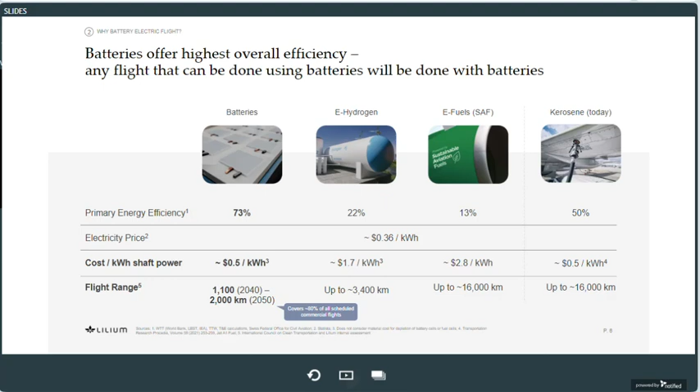Over the next 1 or 2 decades, we expect 75% of electric aircraft performance improvements to come from the battery. So the battery is the performance driver in an electric aircraft. The two key aspects here are power for takeoff and landing, and energy for the range. Beyond that, every cell design is a compromise across many competing aspects such as safety, cost, cycle life, recyclability, and many other factors.

As a short recap, the key differentiators of our Lilium jet are the largest cabin in the sector with clear premium positioning and aesthetics. With $2 per passenger kilometer, we have low operating cost that even includes margin for an operator, and we focus on regional missions.

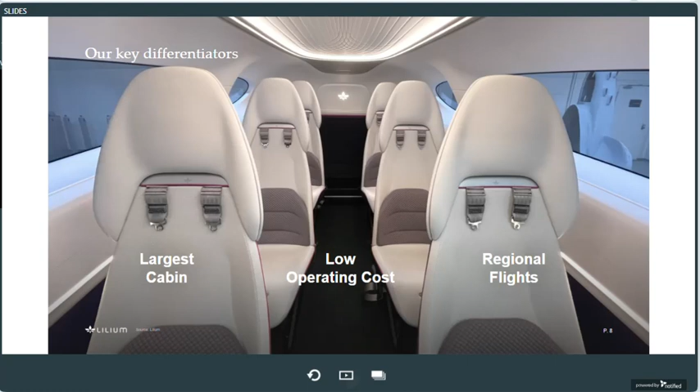And beyond that, on the technical side, of course, we are highly differentiated, developing the first eVTOL aircraft using electric jet engines. 95% of all aircraft on the globe use jet engines. And I'm quite sure if you have flown turboprops, you know from your own experience why passengers prefer jet aircraft. They fly faster, they have lower noise emissions and vibrations in the cabin, they are and feel safer, they clearly have better aesthetics, and on top they are simpler as they don't require variable pitch on the blades.

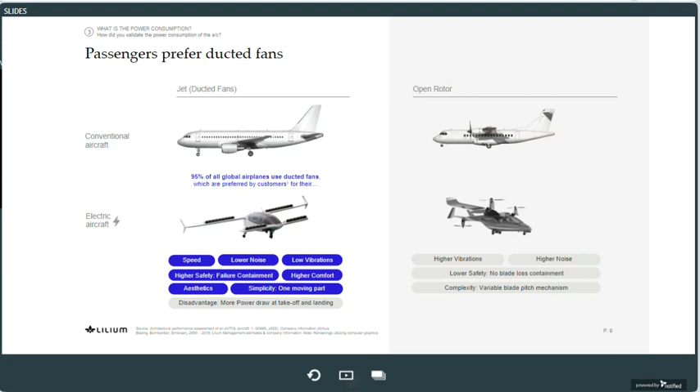However, jet engines are also well known to require more power at takeoff and landing. So let's look into quantifying this disadvantage and evaluate whether the benefits still outweigh the disadvantage.

To get going, we need to understand the concept of disk loading. Disk loading is the weight of the aircraft divided by the total cross-section of all propellers or engines. And what you see on the left is a graph drawn up by NASA around 20 years ago, showing the hover efficiency of various aircraft types depending on their disk loading.

This is applied physics, so this graph does not change, just like gravity, the Earth's surface, or pi does not change. In general, the rule applies that the lower the disk loading, the lower the aircraft power consumption in hoverflight. But also, the higher the disk loading, the faster the aircraft flies.

You can see that a helicopter has the lowest disk loading among traditional aircraft, with around 25 kilograms per square meter. On the other side, on the right, a direct lift aircraft such as the F-35 is operating at roughly

1,000 times higher disk loading since it is a high-speed aircraft. Now we will use this chart to get an idea of the power consumption in hoverflight in a very simple way. Our aircraft is using jet engines and it has a disk loading of around 1,150 kg per square meter. We go into the chart and obtain a lift efficiency of around 1.7 kilograms per kilowatt of shaft power.

Now we invert this value to obtain shaft-specific power. We divide by the electric powertrain efficiency to obtain specific electric power, and we multiply with our aircraft weight to finally obtain the total electric power draw of 2,147 kilowatts.

Now let's do that very same exercise for a propeller-based eVTOL, which typically has around 60 kg per square meter disk loading, and we get 1,014 kilowatts.

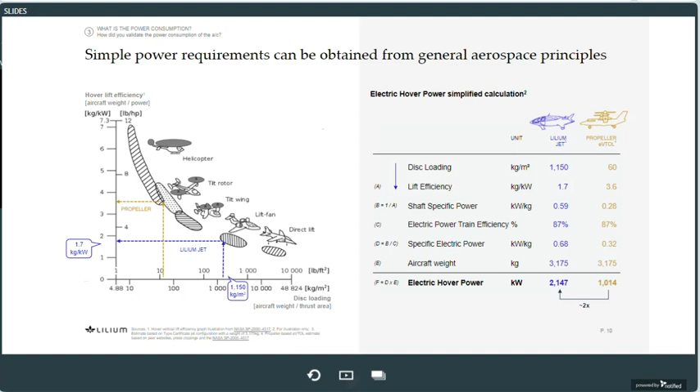But before just accepting those values, let's check how they compare to power measurements from our real-life flight testing with our demonstrator aircraft. On the left chart, you see the measured specific electric power of our demonstrator aircraft in a pure hoverflight mission. This is the first time we are publishing this data.

Now we can take the specific electric power consumption measured in hoverflight, 0.62 kilowatts per kilogram. We multiply on the right side again with the weight of our aircraft, and we are getting the power consumption based on real flight measurements.

What you can conclude from this slide is that our flight test results show slightly lower power consumption than what we got from the NASA paper. But overall, the simple approach of the NASA paper predicts power very well.

I will use the high power consumption value from the NASA paper throughout the rest of this presentation to be conservative and also account, for example, for flight at higher altitudes. Also, it is important to note that all our mission profiles and range estimates are based on the fully loaded aircraft. So with the full weight, we are flying those missions.

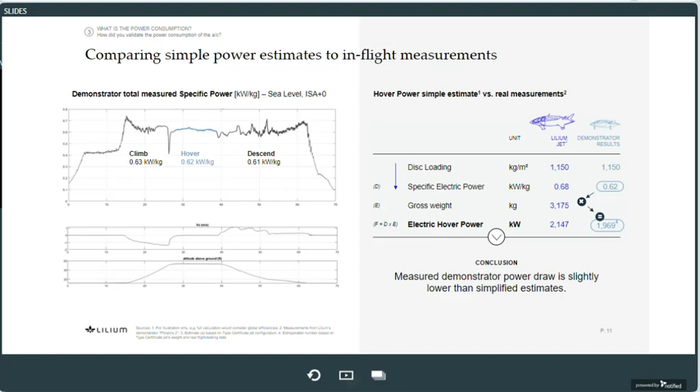What I have just done is an ultra simple approach to demonstrate power consumption, which you can easily follow in a presentation. Of course, our engineers are using far more sophisticated tools to calculate the power consumption of our aircraft. We are following the principle of evidence-based engineering at Lilium.

This is the same approach which allows the major aircraft OEMs to predict fuel consumption of their aircraft with an error of less than 1% before they actually fly.

What we need for certification of the aircraft is a validated aircraft performance model which accurately predicts flight physics of our aircraft in all flight conditions. This includes, for example, failure cases, the full speed envelope, altitudes, temperatures, and maneuvers.

To get it, it all starts with simulations. Based on those simulations, we design a first loop of our aircraft and systems. Then we did 4 years of flight testing and a total of more than 5 months of wind tunnel testing

to obtain real-life data with which we can calibrate and validate our simulation tools. Additionally, we measure compressor maps, motor efficiency charts, and we do battery characterization. Then we take all this data and integrate it into an aircraft performance model, which is validated by real-life data and which can be used also for certification.

All our power profiles and mission profiles, also those in this presentation, are based on this validated aircraft performance model. And you can imagine, as we use this model for both certification purposes, but also to make performance guarantees in the binding contracts with our customers, the rigor that goes into it is incredibly high.

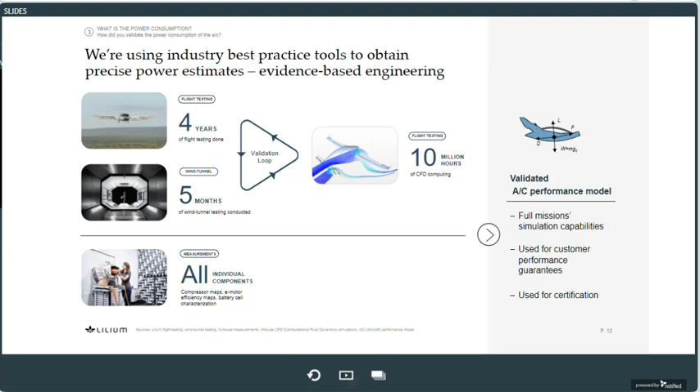This is the power consumption profile of a long-range mission of 175 kilometers, as it now comes out of our validated aircraft performance model. You can see a short high power peak for takeoff, then power quickly drops during transition flight, and you can see the climb phase, the steady cruise flight in the middle, and the descent in cruise where the power draw is close to zero.

Then in transition back to hover, the power quickly increases again until touchdown of the aircraft. The surface under that curve in this chart represents the energy consumed. The hover phase in this mission makes around 9% of the total mission energy.

A propeller eVTOL would only reduce hover energy from 9% to around 4%, as it consumes half the power in hover flight. However, our engine cross-section is better sized for efficient cruise flight, and we are significantly more efficient than propeller-based eVTOLs in cruise flight.

Overall, Lilium's jet consumes less power for long missions. The increased power consumption in hover is more than compensated in cruise flight.

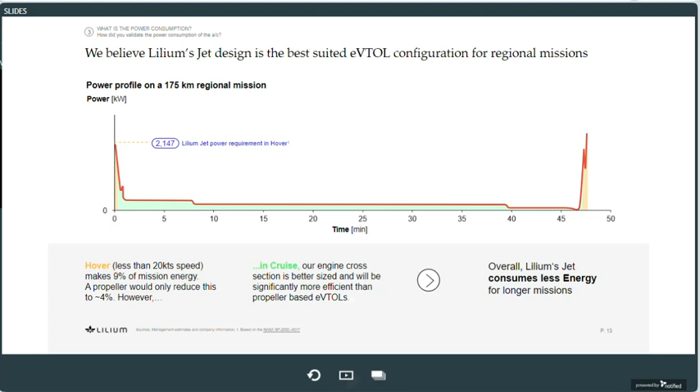On top, we are flying significantly faster in our long-range mission compared to our peers. Hence, our aircraft is ideally suited for regional missions, and the better batteries get, the bigger our advantage becomes.

Now we shift our focus to how the battery cells provide this power and energy. The power consumption in hover flight divided by the total mass of battery cells in the aircraft gives us the specific electric power we draw from the cells in hover flight.

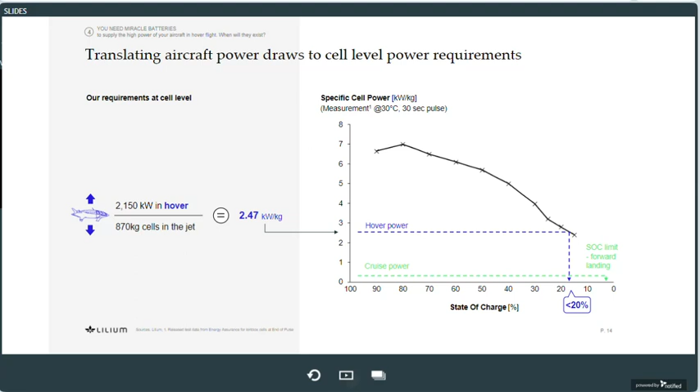In contrast to what I've just shown, we have heard concerns that our aircraft would be dependent on battery technologies half a decade away. This is obviously wrong.

In fact, we have done 4 years of flight testing with full-scale demonstrators, and all of our demonstrators have been flying with off-the-shelf batteries using standard lithium-ion chemistries.

In 2019, we flew our Phoenix 1 demonstrator first time, and the cells in the pack were the LG HG2 cells, which were designed already in 2013. It's a well-known 18650 cell, which you can actually buy on Amazon.

In 2021, we then flew the second generation of our demonstrator. Again, we used a standard lithium-ion chemistry with a graphite anode. This time we were using a Kokam cell, which was originally designed around 2015 for forklifter applications.

The battery pack in this aircraft was also the first flying prototype we had which fulfills the full fire containment requirements from FAA. So we have 4 years of flying proof that standard lithium-ion chemistries can provide the power we need for flying this aircraft configuration.

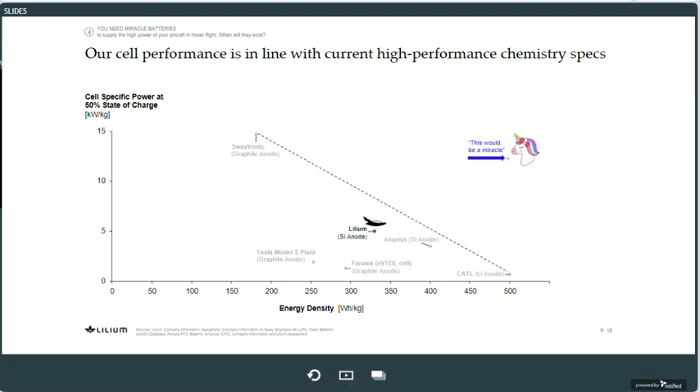We are not alone using silicon anode cells. It is widely recognized that silicon anodes are the next step in lithium-ion batteries in automotive. There's a great article from IEEE Spectrum explaining why silicon is the next big thing in lithium-ion batteries. It enhances energy, power, and allows fast charging without cycle life degradation. For those reasons, GM, Porsche, and Mercedes have all announced premium cars for the timeframe 2024 to 2026 using silicon anodes like we do. Tesla has also announced bringing silicon into their cells. So by the time our aircraft goes on the market in 2026, our cell chemistry will be state-of-the-art in premium automotive. But this also means if you come on the market in 2026 with an electric airplane using graphite anodes, you are using a dated technology that is no longer competitive.

Another question we sometimes get is whether the power draw grows tremendously in failure cases. Our engineers have thought extensively about this, and we wouldn't obtain certification if we had no answer. To mitigate this, our aircraft has 10 independent battery packs. If one fails, the remaining packs need to provide only 11% more power. This is in line with what the cells can produce in an emergency. We always take worst-case failures into account in our design, and we have tested the power increase resulting from all kinds of aircraft failures on our cells.

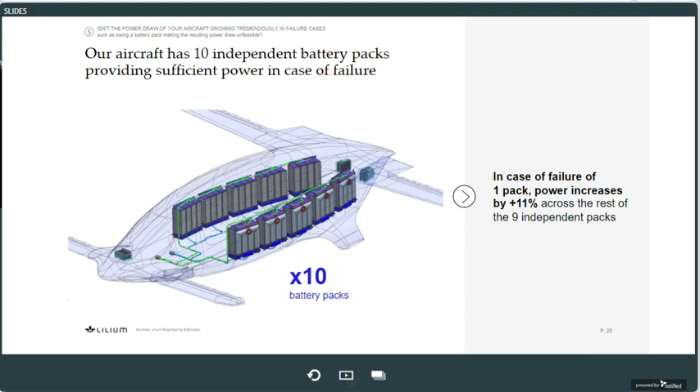Another question we've received often is whether our battery pack will become too heavy once certification and safety requirements are incorporated. We have already incorporated all safety requirements into our current battery pack, such as crash protection, fire containment, flight loads, and redundancy, since this battery pack goes into our conforming aircraft. The first pack with full fire containment was the Phoenix 2 battery, which flew in 2021. Since then, we've done several years of flight testing, and those tests have confirmed that our design is compliant with the regulation.

Another question we hear often is what reserve concept we are using, and what operating range is left using this reserve concept. On the European side, EASA have formally released an operating reserve concept called Part IAM, which is applicable to our aircraft. Part IAM is a performance-based framework. There is no specification whatsoever for hover time. All our operating range estimates and our aircraft design are based on the EASA Part IAM reserves concept. This reserve concept is stricter than any other operating framework for helicopters, since it mandates landing on a vertiport in all cases, even the most critical failures.

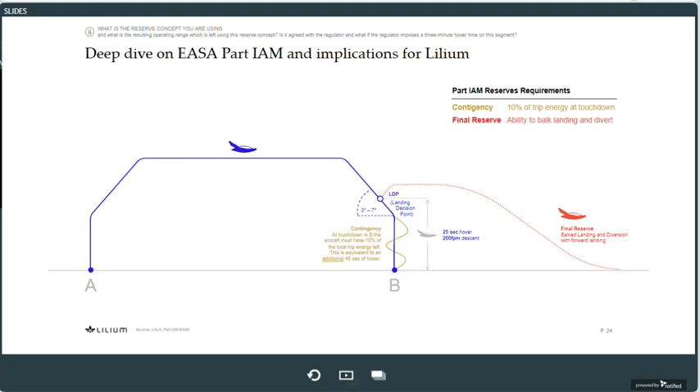To validate the reference landing procedure, we are using again a best practice aerospace approach. We have a mixed reality 3D simulator with a fully representative cockpit and a full motion platform. This simulator contains the validated control laws and flight physics from our certification aircraft models. We can simulate wind, rain, and night conditions in various combinations.

In this simulator, we have developed our reference landing procedure, and we have tested it with more than 750 landings with multiple pilots. We have also developed some landing aids, which make it easier for pilots to consistently land the aircraft with our landing procedure. The result is that pilots can consistently execute the reference landing procedure as requested by the regulator. This is a great testament to how well our pilots and engineers have optimized the handling qualities of the aircraft and the landing aids as well as the total procedure.

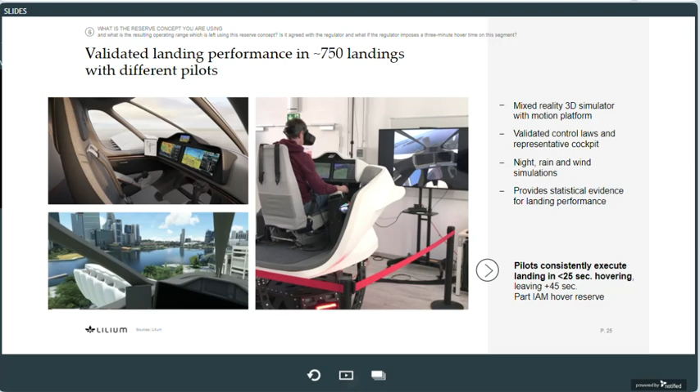Another question we sometimes get is whether we've tested these full flight profiles also on our cells. Of course we have. On the left chart, you can see the minimum voltage of our cells at the end of landing for different mission lengths using our reference flight profile. To test this, we simply run the same flight profile again and again, and each time we extend the length of the cruise flight segment until we violate the minimum voltage of the cell at the end of the flight.

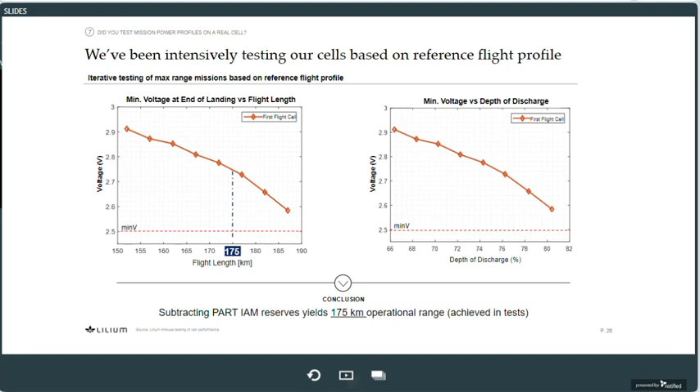Some people also have repeatedly questioned the cycle life of our cells, since new high-performance chemistries actually often have great performance but reduced cycle life. And in our case, we specifically picked this technology here because it yields exceptionally good cycle life.

Here you can see a cycle life test with our cells from 1 year ago, which we conducted at Idaho National Laboratory. The procedure was 100% full charge and discharge over 1 hour each. This is a very common test in the battery industry because it allows comparison between different types of cells. The result was that our cells retained 88% of their original capacity after 809 full cycles. This is an exceptionally good result, and it surpasses many standard chemistry cells we've been working with so far.

There are chemistries out there which yield even higher performance than this one here, but we have so far not tested one which achieved a similar good cycle life at the same time.

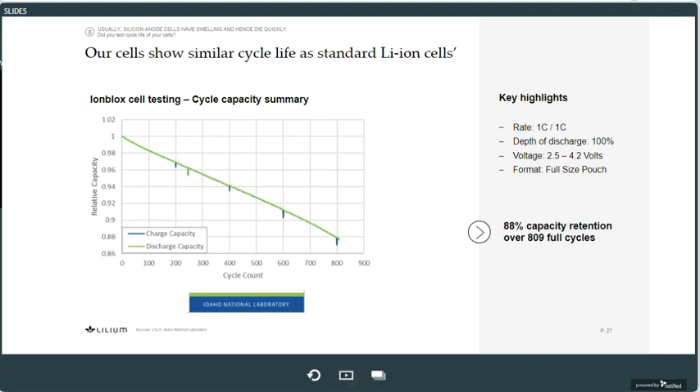A concern which our engineers had was whether repeated fast charging in operations or the high power pulses during takeoff and landing could significantly reduce the cycle life of the cells. So we came up with a heavy-duty test using a flight profile in which we continuously fast charge the cells and fly the aircraft with maximum takeoff mass in mid-range missions, and additionally we did not actively cool the cells.

The result was that they achieved 1,450 mid-range flights with fast charging, and they still had 88% of their capacity retained. An amazing outcome. For comparison, our business case currently assumes 800 flight cycles only, so there's plenty of margin on the cycle life.

But why did the cells achieve even more cycle life in flight cycles than in the standard test? Our interpretation is as follows: fast charging doesn't really harm silicon anode cells. Their big advantage is that they can handle much faster charging without damage.

The high power draws in takeoff and landing were already carefully mitigated by Ionblox in the cell design. The cells have opposite-sided tabs and are electrically symmetric on the positive and negative side. This completely avoids hotspots in high power operations.

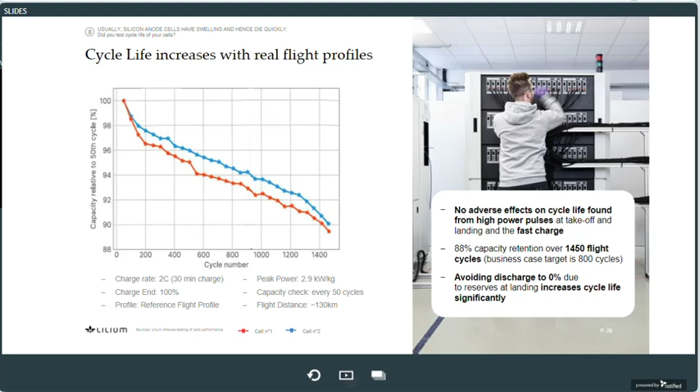We have now extensively discussed performance and cycle life of the cells. Let's now shift to industrialization and supply chain. Our cells are being produced at Custom Cells in Germany. Custom Cells started production for us in 2021, and meanwhile they have a dedicated production line for Lilium.

equipped with state-of-the-art equipment for automated cell manufacturing. They are shipping cells on a weekly basis to us, and ensuring compliance with aerospace traceability and conformity standards. At the moment, both Custom Cells and us are laser focused on ramping up production rate and continuously increasing quality and yield of the line.

But why are we able to produce these new cells with automated equipment already? Well, the answer is very simple. 30 out of 31 production steps are the same as for any other lithium-ion battery, and this allows us to use standard cell production equipment. This is a big advantage of the chemistry we've chosen.

One of the biggest problems with novel chemistries is often not the performance, but that they require new production processes or new supply chains for raw materials. We have very carefully selected our technology to avoid those risks. Even for the one novel step, the pre-lithiation, we are using a simple calendaring process for which automated machines are available and which is expected to be very scalable.

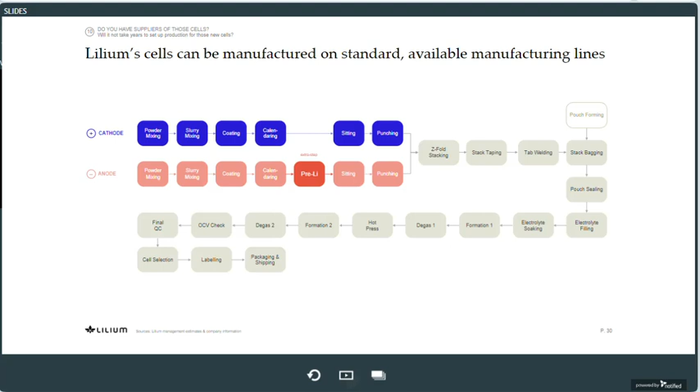Pre-lithiation means you are adding additional lithium to the cell during production. So how does that work? We are buying a plastic foil from Applied Materials, which is coated with lithium. This lithium foil gets pressed on the anode of the cell in the calendaring machine, and the lithium then transfers from the plastic foil into the anode.

Applied Materials have been a great partner on this for several years, and they are also an investor in Ionblox alongside us. The pre-lithiation of the cell increases capacity, and it also improves the cycle life of the cell. It's a process which is currently being implemented for many high-performance cells in the automotive sector.

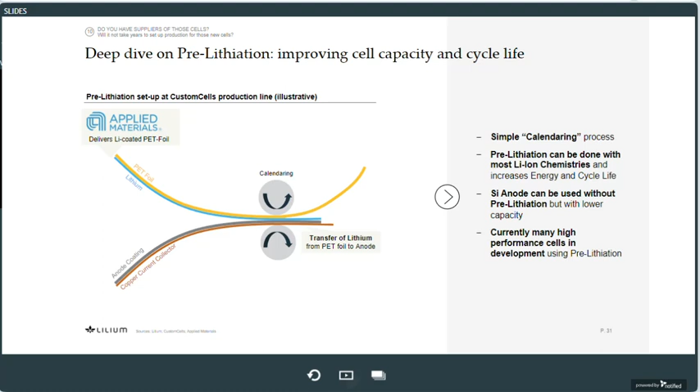Our primary cell production partner, Custom Cells, has consistently increased output and quality over the past year. But since batteries are a critical component, we are de-risking our battery production with a multi-sourcing approach. As mentioned earlier by Rama, we have extended our existing partnership with Inobat to prepare large-scale production of our battery cells.

Hereby, Inobat is being supported by its investor and partner Gotion. Gotion is one of the world's largest battery manufacturers, and VW is the largest shareholder in Gotion. Production of Lilium cells at Inobat's existing facilities in Slovakia is due to start in early 2024. Inobat will also build Lilium cells at its future Gigafactory, which they are jointly setting up with Gotion in Slovakia. This factory will have up to 4 gigawatt-hours of production capacity, and it enables scaling of our business significantly.

As shown in this presentation, our market entry cells are working and we have the supply we need. But this is just a starting point for us. We want to continuously extend our lead on battery technology. Our aircraft is designed such that we can upgrade the battery packs without changing the aircraft.

Similar to VW, we have defined our own unified cell format, with which we are working on a roadmap of cell performance upgrades while still using existing manufacturing lines and partners. In a first step, we keep our existing chemistry and we only make mechanical improvements to the cell overhead. This enables around 350 watt-hours per kilogram.

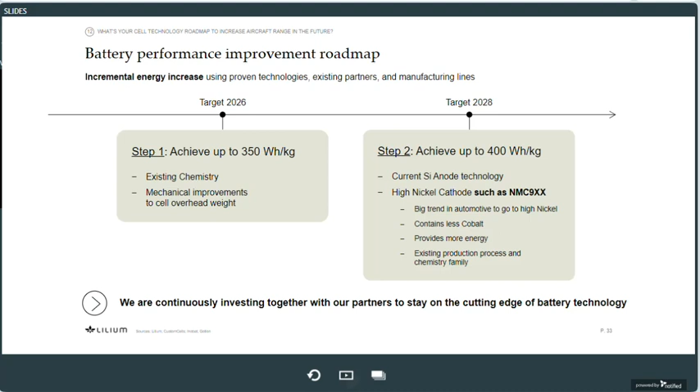Where are we heading to in the future? We are globally by far the most advanced company in design and certification of an electric jet aircraft, certified against the same safety standards as a commercial airliner. So we are best placed to lead electrification of regional aviation by applying our technologies and know-how also to larger aircraft platforms.

These will be both eVTOL jets and conventionally taking off and landing electric passenger jets. What you see on this slide is how the operating range of eVTOLs and conventional electric passenger jets improves over time, if you assume a 4.5% energy increase per year for the battery cells.

This is attractive in two ways for us. It squarely increases our market size and sustainability impact, but battery upgrades to the existing fleet are also a strong revenue stream for us.

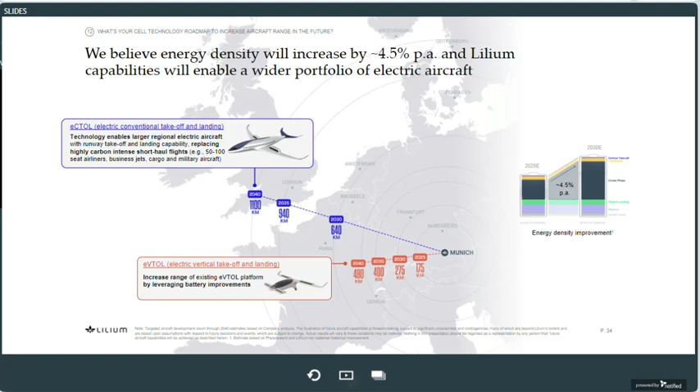So just to summarize the main points for today: you now know the power requirements of the Lilium jet, how they have been measured and validated. We've seen measurements of our cells showing that they handle these requirements very well. We've explained regulators' reserve concepts and shared measurements of our cells, confirming 175 kilometers operating range with those reserves taken into account. We have shown how our landing performance has been validated and that our cells have plenty of margin on cycle life. Last but not least, we've shown that we have de-risked production and supply of these cells in existing lines and a multi-sourcing strategy with strong partners.

The battery cell technology we selected strikes a great balance between performance on one side, but also low-cost production, available materials, and high cycle life on the other side. Our aircraft and cell technology are driven by our focus on the regional business model, where time savings are much larger than in urban air taxi applications, and the TAM is larger than for urban air taxis as well. In this big market, we are clearly leading the group with our cell technology, our jet aircraft architecture, the 6-passenger cabin, and the industry-leading low operating cost.

To conclude on this presentation, the battery dominates the performance of an eVTOL. Hence, over the last 4 years, we have continuously invested and built an edge in this field. And we are convinced the battery has turned from a challenge to being a clear competitive advantage and a moat to our eVTOL technology. And with this, I'll turn it back to Rama now.